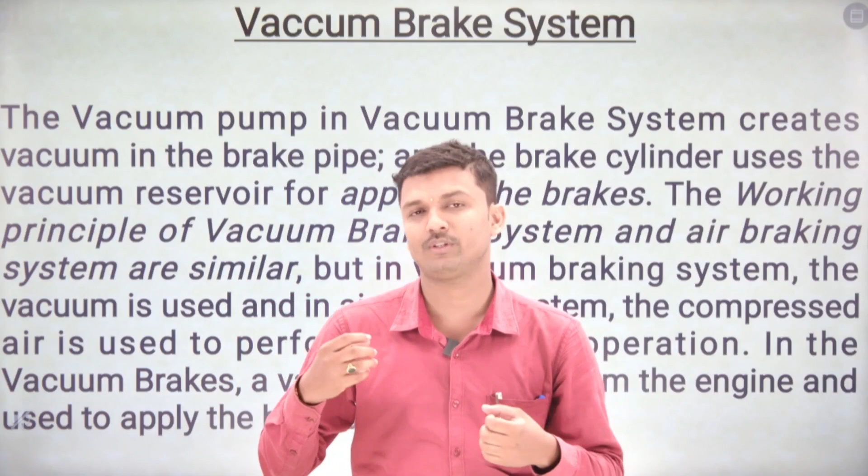If you discuss the working principle of vacuum brake, the simple working principle is that when you release the brake pedal, the internal vacuum allows the engine vacuum to flow from the check valve to equalize on both sides of the diaphragm. There is also a diaphragm that separates both atmospheric pressure and vacuum pressure.

When you apply the brake pedal, it moves forward, closes the vacuum port, and allows the open air inlet valve. The backside of the diaphragm moves, and simultaneously filtered air enters it. When you engage or disengage the brake, the vacuum front side allows the master cylinder to push the fluid or hydraulic fluid toward the engagement of the braking system.

To summarize the working principle: first you draw the atmospheric pressure. After drawing the atmospheric pressure, there is a separation between the vacuum pressure and atmospheric pressure in the servo cylinder, by means of a diaphragm, which allows the braking system to move the piston rod of the servo cylinder forward. That piston rod moves toward the brake drum for engagement and disengagement of the brake. This is the complete scenario of the vacuum braking system, the simple working principle.

I will now discuss this in complete detail by means of a schematic diagram of the vacuum braking system, or VBS - short form VBS, that is vacuum braking system.

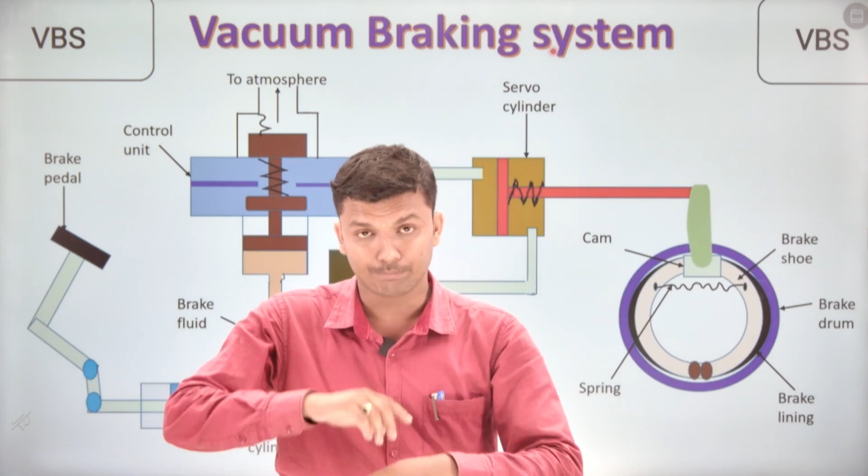If the piston of the servo cylinder moves towards the right hand side, by means of the spring arrangement, this linkage will push the cam arrangement in the brake drum. During the starting of the braking process, this brake system is completely mechanical, similar to every braking system. At the brake drum, all the processes are similar to the mechanical braking system, but the process by which the brake gets engaged is what changes. But remember, at the main point of the braking system, the brake drum of every vehicle works only as a mechanical brake system.

The similar thing is there, known as a retractor spring containing the brake shoe. The brake shoe, after getting the force by means of this linkage, will go against the brake drum or the friction lining. The brake drum will be stopped. If the brake drum stops, the wheel will stop. If the wheel stops, the tire will also stop. The rotation of the vehicle is now at rest, or the brake is engaged.

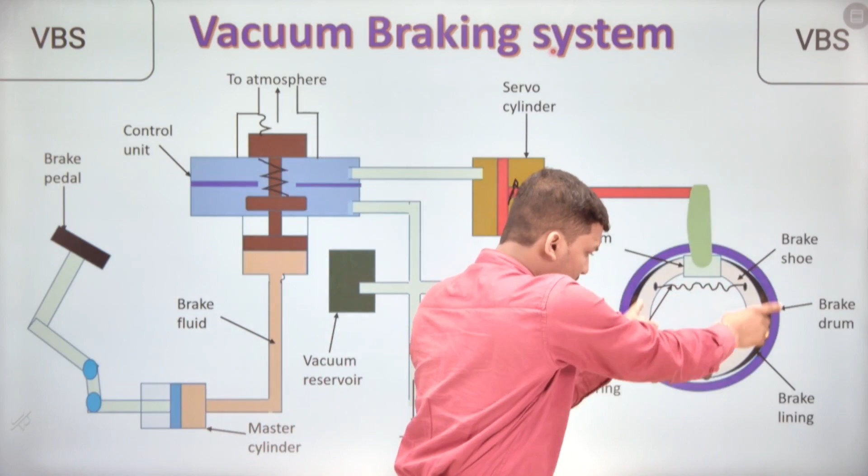Now reverse the condition: when you release or disengage the brake pedal, the brake shoe comes back to its original position by means of the retractor spring. Then the forward movement of the piston returns to the backward, original position by means of the spring arrangement. Then the non-return valve opens, and all the air present, or some amount of air, goes inside it again and moves toward it. The upper part of the piston comes down, the same arrangement comes back to the point of contact, with the upper piston, spring, and lower part all returning to position. Then the master cylinder fluid comes completely back to its original position.

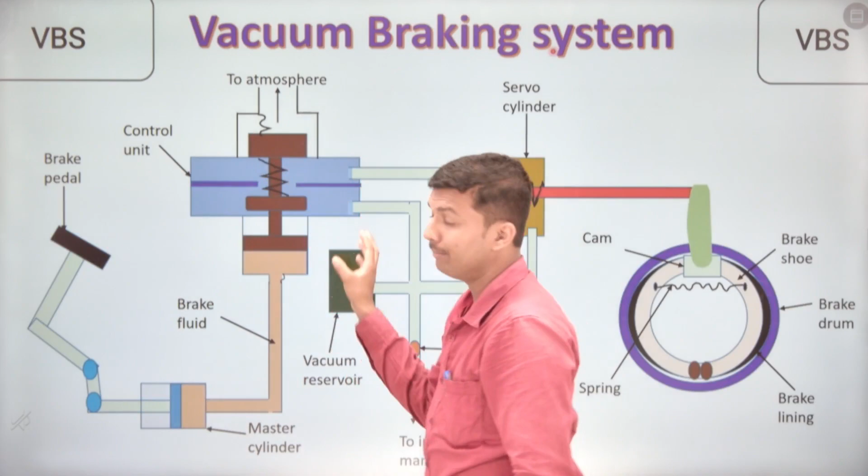Now what happens? The atmospheric pressure flows into it again. There is no closing valve there, so it becomes completely full of atmospheric pressure. This is again the original position coming into contact. This is known as the complete working principle of the vacuum braking system.

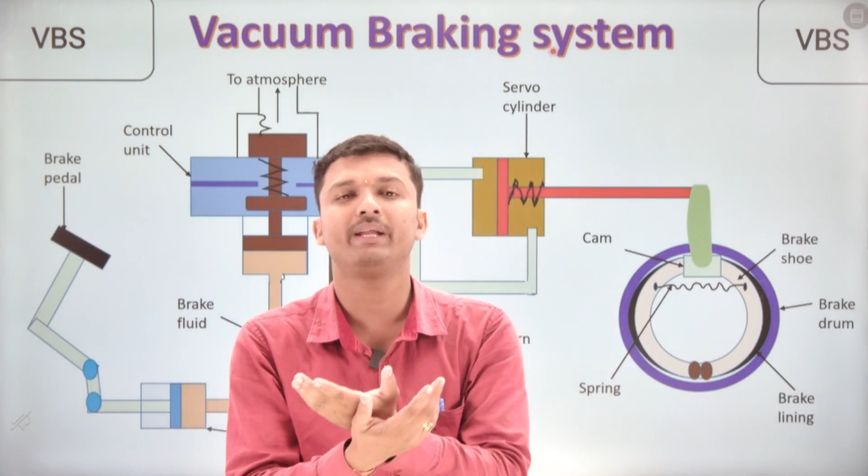Now I'm going to explain with an animated video how it is working. In this animated video there is a combination of three systems: vacuum brakes, power servo brakes, and also certain other types of brakes. It's a combined presentation because they are all similar, so this short video combines the three braking systems which are similar to each other.

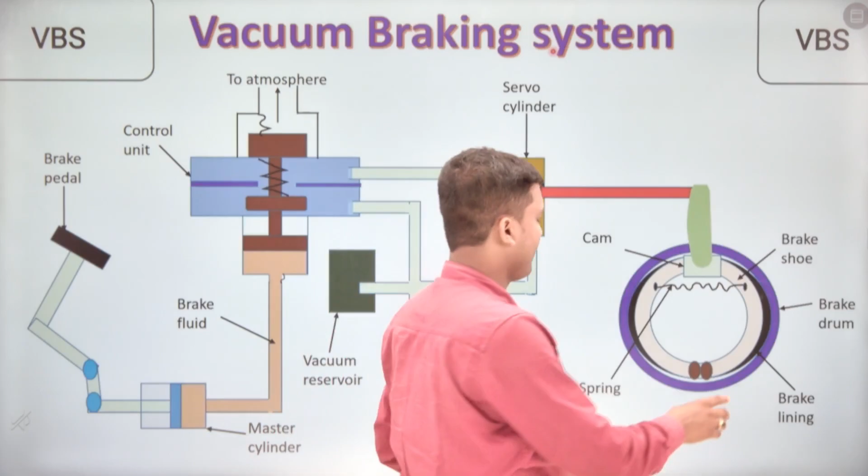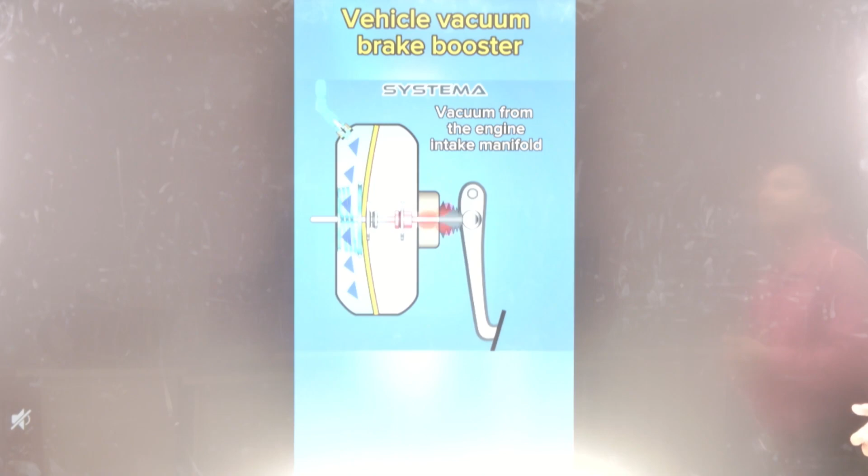Okay, in this video, the vehicle booster system - just press engage. The brake booster vacuum is created on the left hand side, from the engine intake manifold to the brake servo manifold. This is how the working principle of the vacuum brake system takes place, which I just explained.

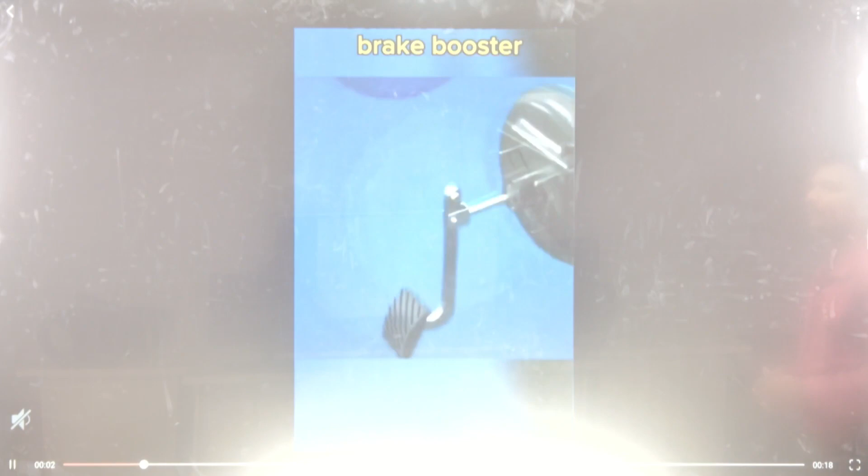It is present in the animated video part. I want to play the video two more times so you can understand it better. This is the complete working principle in animated video of the vacuum brake system with a brake booster present in it, similar to the power braking system and air brake system.

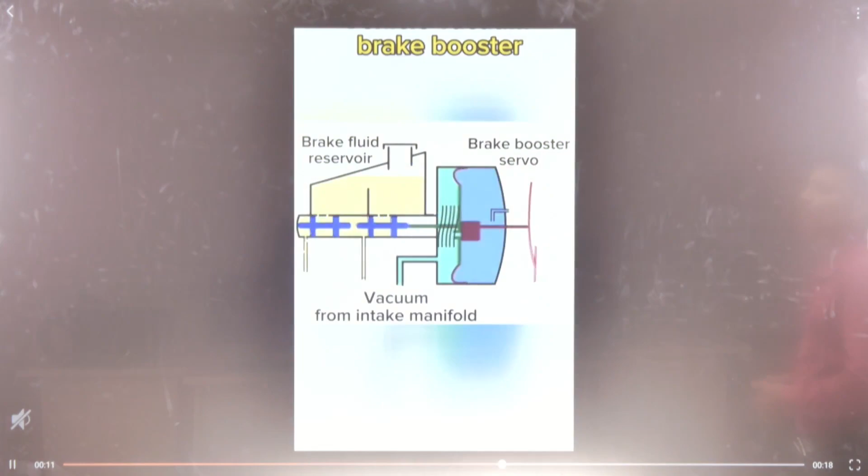If you want to watch this video during the time of the classes, you can pause the classes, or you can reduce the speed of the classes. This way you can watch it properly. As this video is going very fast, you can watch it personally by reducing the speed of the video.

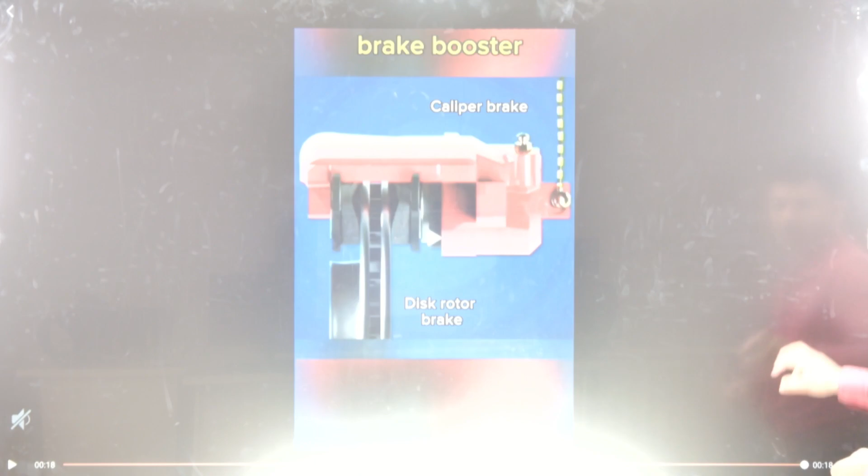Next we are going to study the advantages and disadvantages of this braking system. What are the advantages and disadvantages of this braking system?

The first advantage of the vacuum braking system is that it is very simple in design. What does very simple mean? It contains the master cylinder and everything, but it is not as simple - there is some complicated design involved, but it is not as complicated compared with the power brake system.

The vacuum braking system is safe in use - why? Because we are mainly using vacuum or air in the working chamber. If there is a leakage in any lining, pipe, or joint, it is not so dangerous for us.

This type of braking system is highly reliable, meaning it can be used without failure during vehicle riding. Like the power servo brake or vacuum brake, we can rely on it more.

The disadvantage of the vacuum braking system is that it is very difficult to find leakage in it. If there is any leakage, since there is no odor and no fluid like a liquid, we cannot recognize the leakage quickly or rapidly, because it is very difficult to detect the leakage of air.

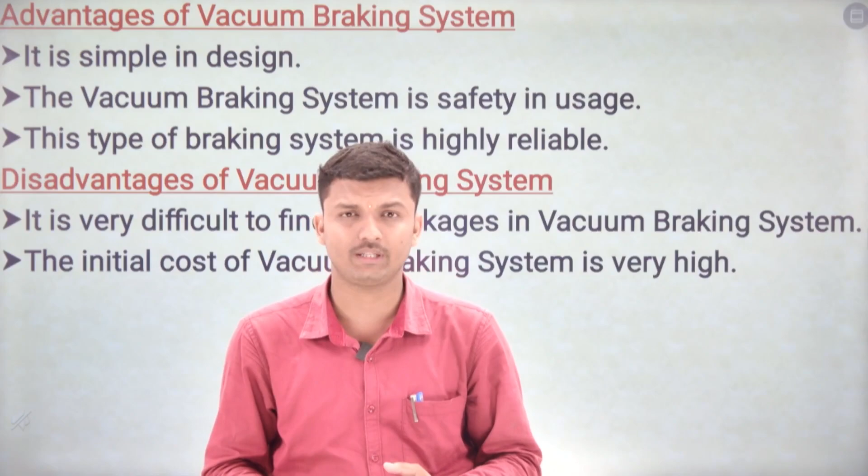It is a basic thing that like the air brake system and power brake system, the vacuum brake system works the same way. In the next classes, I will discuss the most interesting brake system - a very important and very interesting brake system in today's generation market. This is one of the most significant brake systems, one we cannot avoid - the modern disc brake system.

Up to this point, in the 8 classes I've covered on braking systems, we have used rubber brake lining and mechanical, hydraulic, and pneumatic pressure brakes - hydraulic brake, pneumatic brake, air brake, mechanical brake, servo brake, and vacuum brake. But the disc brake system is completely different in terms of the brake drum compared with all the previous braking systems. That's why it is one of the most significant, rapidly used, and modern developments in brake systems.

Which I'm going to discuss in the next class. So stay tuned to my video and watch the next class. The most interesting brake system in modern society is the disc brake system. Thank you very much.